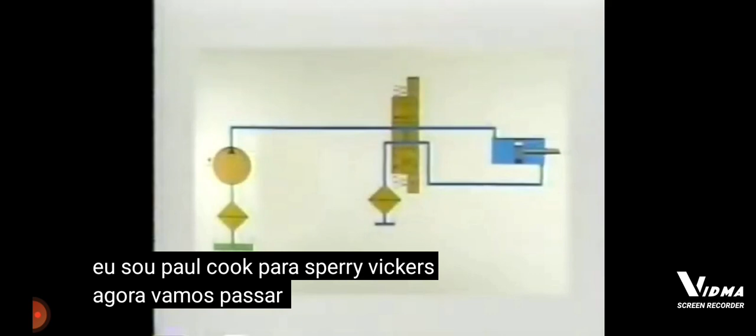Let's move to a graphic example of another circuit. We'll need a cylinder, a directional valve, and of course a pump and a reservoir for fluid. Filters too are a necessity with today's highly efficient components.

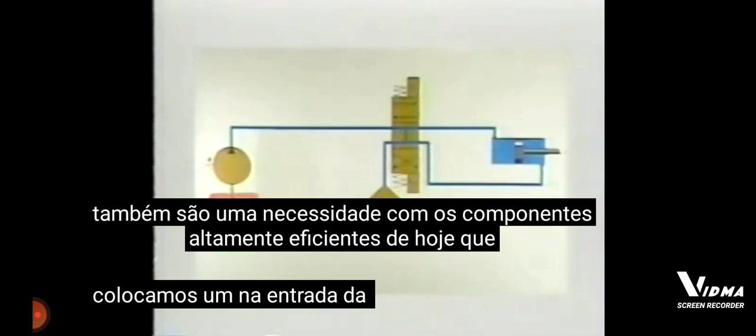We placed one at the pump inlet and one in the return line from the directional valve. Now by shifting the directional valve back and forth, we can make the cylinder reciprocate, but we haven't provided a place for the oil to go when the cylinder stops at each end of its stroke. So we need a form of pressure control. We'll use a relief valve.

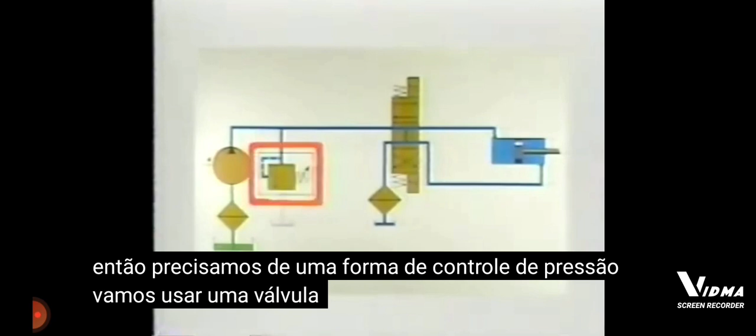Now we'll need something to drive the pump, and that can be anything you select, from an electric motor to a windmill, as long as it can provide the necessary torque and proper drive speed.

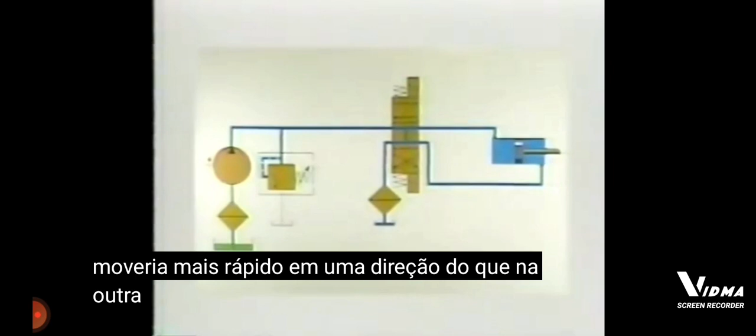If this were a circuit for a grinder, we might have a problem. The table would move faster in one direction than the other because of the differential areas in the cylinder. A simple fix would be to use a double-ended cylinder. Then the speeds and forces would be equal in both directions.

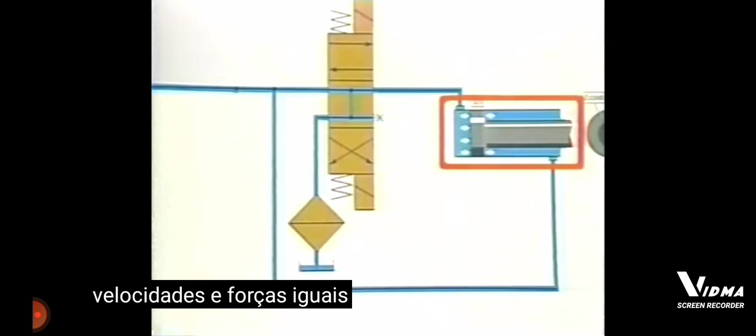Now there is another way we could get the same results. It's called a regenerative circuit. For equal speeds and forces, a cylinder with a 2-to-1 area ratio is used. That means with the piston retracted, the fluid in the rod end would be half of what's needed to extend the cylinder.

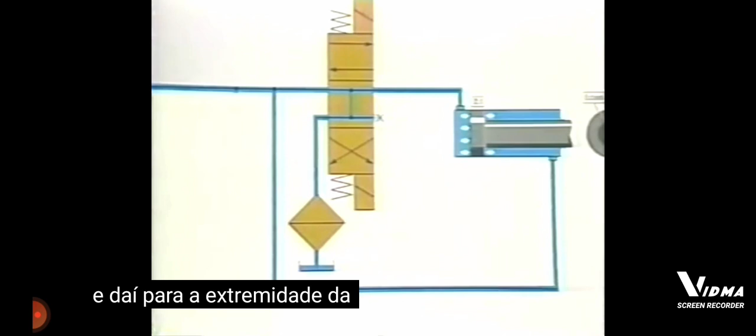To make it work, fluid from the rod end, instead of going to tank on the extending stroke, is routed back to the inlet side of the directional valve, and from there into the cap end. This means we will have equal pressure on both sides of the piston, but the greater force on the cap end, because of its larger area, will cause it to extend.

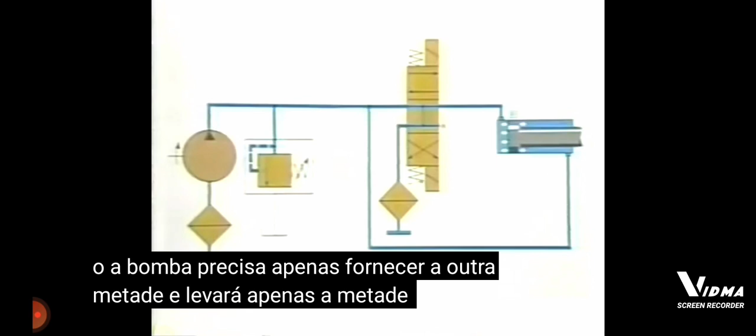Since the fluid displaced from the rod end provides half of the fluid required to extend the cylinder, the pump needs only to supply the other half, and it will take only half as long as it would in a conventional circuit. No, we didn't get something for nothing.

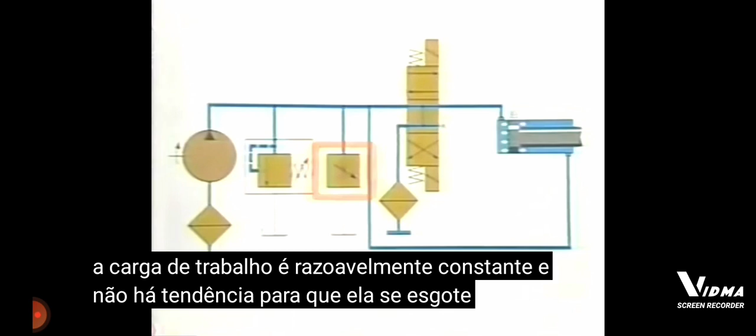Pressure in the rod end resists the forward travel, so what we gained in speed, we lost in force. If it were necessary to regulate the speed of the cylinder, this would be a good application for a bleed-off flow control. The workload is fairly constant, and there's no tendency for it to run away. We would save some energy, too, in that the pump would operate at the workload pressure rather than the